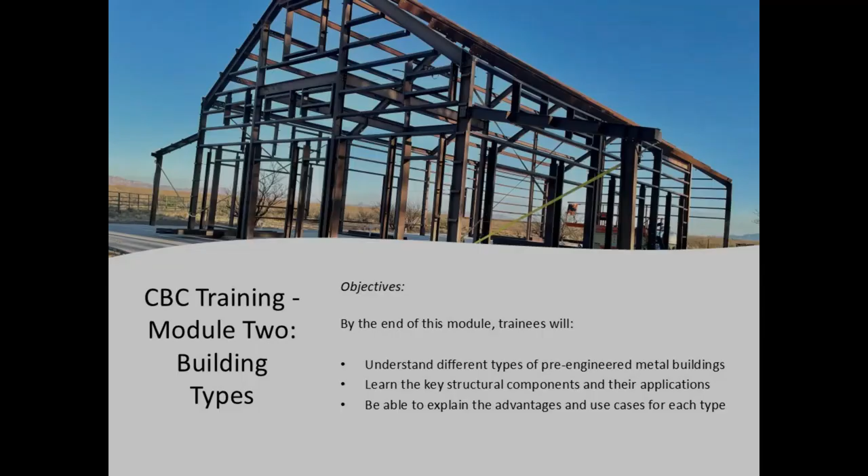Pre-engineered metal buildings, or PEMs, are factory-fabricated and standardized building systems. They provide an efficient, durable, and cost-effective alternative to traditional construction. These structures are used in various industries for many different applications. Some common uses include warehouses and storage facilities, manufacturing plants, retail and commercial buildings, aircraft hangars and truck terminals, agricultural and farm structures. Now let's explore the different types of metal buildings used in these industries.

The first type of building we will discuss is the clear span building. A clear span building combines the proven strength of a rigid frame with exceptional size flexibility. These structures maximize interior space, making them ideal for manufacturing plants, warehouses, offices, and retail stores, where uninterrupted open areas are essential. Beyond the interior, size flexibility also plays a key role in optimizing land use, ensuring efficient site planning.

Inside a clear span building, you have near total flexibility to customize the height, width, and roof slope to meet specific project requirements. Clear span buildings are designed with no interior columns. This allows for maximum open space, making them ideal for large equipment, storage, or work areas. Key features include widths ranging from 20 to 150 feet, eave heights between 10 and 30 feet, roof slopes between 0.25:12 and 4:12. Available in tapered or straight columns, can be expanded using lean-to structures.

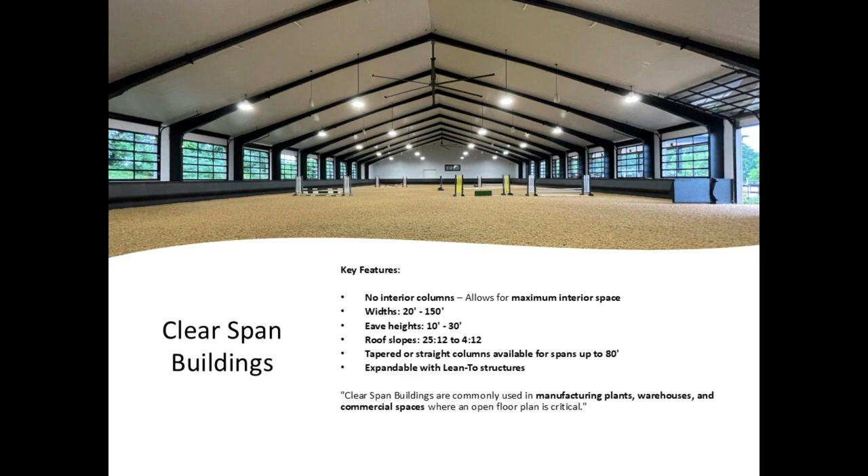Let's take a moment to review the advantages and considerations of clear span buildings. Advantages: clear span structures offer no interior obstructions, making them ideal for large equipment, storage areas, or open workspaces. They also provide flexible design options, allowing for adjustments in height, width, and roof slope to meet project-specific needs. And with future expansion in mind, clear span buildings can easily integrate lean-to additions, giving you room to grow.

Considerations: however, they may not be the most cost-effective solution for extra-large buildings. Wider spans often require heavier framing, which can increase material costs. Up next, we'll take a closer look at multi-span buildings, a great option for larger projects where cost efficiency is key. Multi-span buildings use interior columns to provide additional structural support, making them cost-effective for large-scale structures.

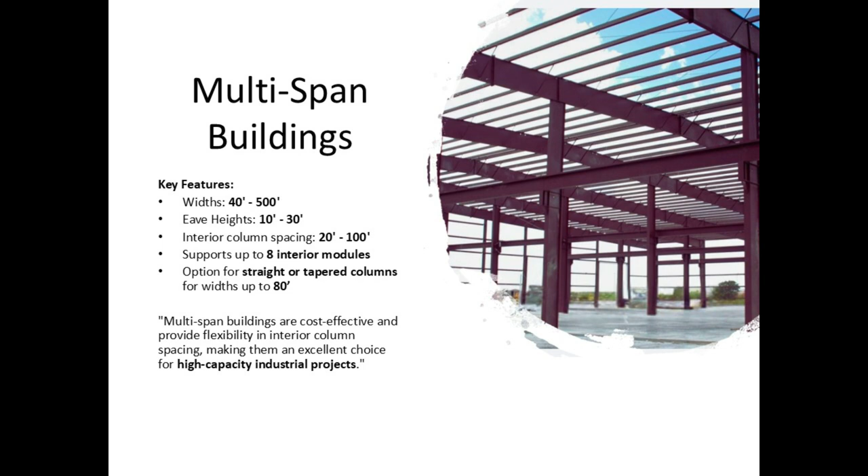Key features include widths from 40 to 500 feet, eave heights from 10 to 30 feet, interior column spacing of 20 to 100 feet, supports up to 8 interior modules, available in straight or tapered columns. These buildings are ideal for industrial projects, truck terminals, and warehouses that require high capacity and flexibility. Now let's look at the advantages of multi-span buildings. They are more cost-effective for large buildings than clear span buildings and provide greater size flexibility. Multi-span buildings can support heavy loads, cranes, and additional equipment.

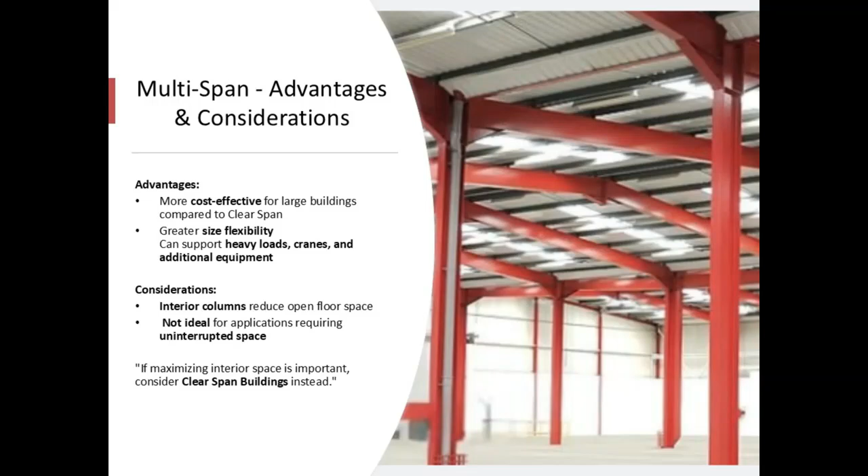Here are some considerations when considering a multi-span building. First, interior columns reduce open floor space. And second, multi-span buildings are not ideal for applications requiring uninterrupted space. If maximizing interior space is a priority, clear span buildings may be a better choice.

Next, let's talk about lean-to buildings. Lean-to buildings provide a cost-effective way to expand existing structures without constructing a separate building. Key features include widths from 8 to 60 feet, eave heights from 8 to 30 feet, roof slopes between 0.25:12 and 4:12. Lean-tos are attached at or below the eave of the main building. Lean-to buildings are commonly used for storage areas, covered workspaces, or as additional facility expansions.

End walls provide structural support and determine future expansion capabilities. We offer 3 types of end walls. The first type is the bearing frame. The bearing frame is the most cost-effective, but not expandable. The second end wall type is the expandable main frame. This frame is designed for future expansion. The third type of end wall frame we offer is the non-expandable main frame. This frame provides structural support but cannot be extended for future expansions. Choosing the right end wall type affects cost, expansion options, and structural integrity.

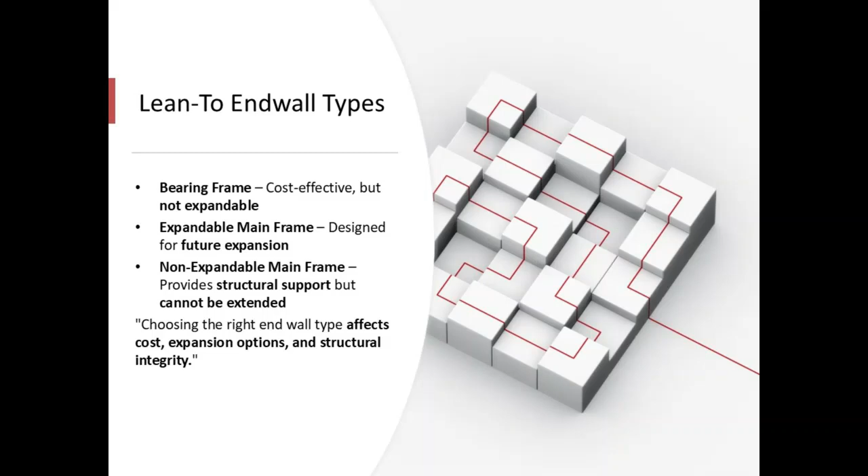The bearing frame end wall is lighter in design and weight than the main frame end wall because it only supports the roof load of one half of a bay. The end wall columns support the channel rafter and also serve as columns for attachment of the end wall girts and transmit wind load into the foundation and structural system. Bearing frame end walls also require a form of bracing, whether it be X-bracing, portal frames, or diaphragm action. The benefit of having a portion of the building with an unobstructed floor area while maintaining the cost savings of a multi-span building.

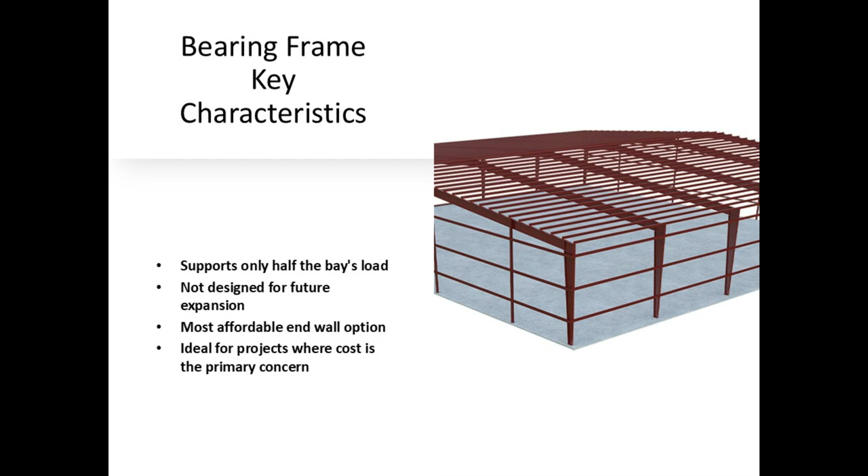The use of a bearing frame end wall is a matter of economy. You will usually find the prices of the bearing frame end walls are much more economical than the expandable main frame end walls. The expandable main frame end wall is used where wall structurals and covering panels are required.

Since the expandable main frame is designed to accept a full bay loading, it may be used for ease in any future expansion. The key characteristics of an expandable frame are, they are designed to carry an additional bay's load. Using this frame allows for seamless future expansion. Expandable frames are built with heavier steel components for added strength.

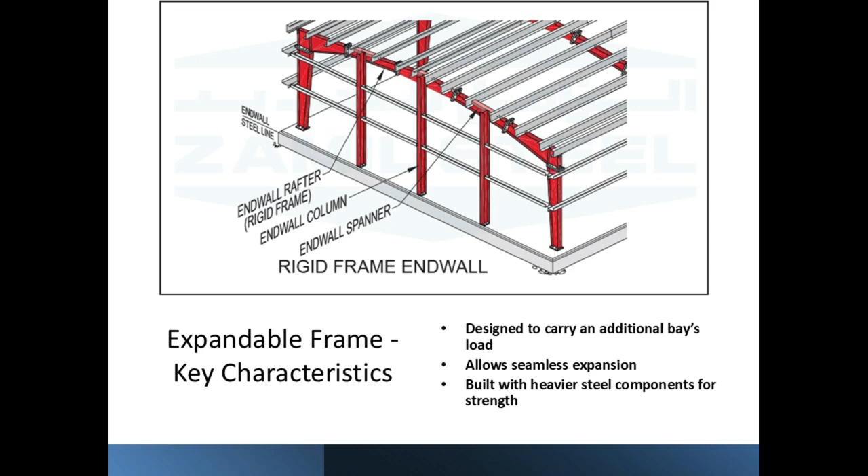The expandable main frame end wall is a combination of the standard main frame with end wall columns. The end wall columns do not support, but serve only as columns for attachment of end wall girts and transmit the wind load into the foundation and structural frame. The expandable main frame's largest advantage is that it provides for easy expansion. Since it is a main frame, it will carry the design load of a full bay, and it can remain in place if the building is expanded.

The non-expandable main frame end wall is still a main frame with end wall columns, but cannot be used for future expansion. The non-expandable frame can only carry the design load of one half bay. Both the expandable and non-expandable main frame end walls provide for more flexibility and ease in locating large framed openings or entrance doors. Locate the openings by simply adjusting the end wall column spacing. Also, the main frame end walls do not require any form of bracing, therefore X-bracing or portal frames will not interfere with large openings.

The characteristics of the non-expandable frame are as follows. They provide additional structural support. They are not intended for future expansion. They are lighter than an expandable frame. They can be used for buildings with large doorways or heavy loads.

When it comes to selecting the right end wall frame, it's important to consider your project priorities. Let's break it down. First, choose a bearing frame if cost is the main factor and expansion isn't needed. This is the most economical option, ideal for fixed-size buildings. Second, choose an expandable frame if there's a possibility of future additions. This frame is engineered to support extra loads, making expansion seamless down the road.

Third, choose a non-expandable frame if your project requires additional strength, such as for heavy loads or large openings. While it doesn't support expansion, it offers the reinforcement needed for more demanding applications. Each frame type has its purpose, so choose the one that best fits the current and future needs of your project. Let's take a moment to recap what you've learned.

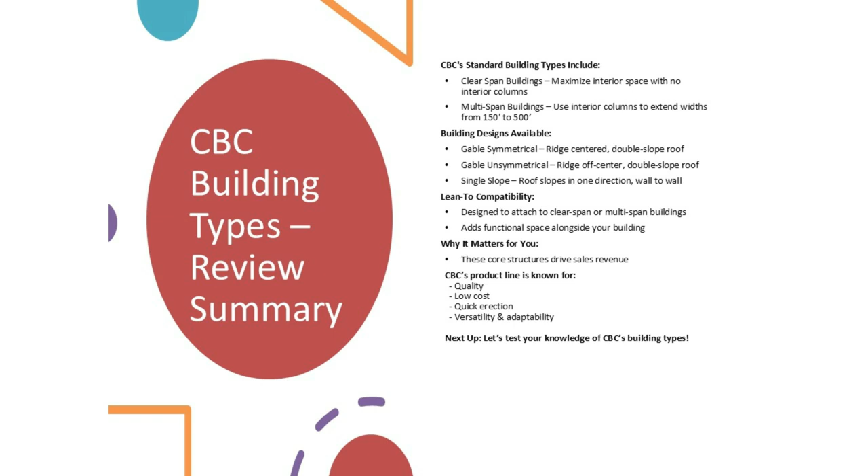These building types form the core of CBC's product line, recognized throughout the industry for their proven quality, cost-effectiveness, ease of assembly, and versatile design options. They represent a key revenue opportunity for you and your business. Now let's test our knowledge of CBC's building types.

Now that you've completed the core content of Module 2, it's time to put your knowledge to the test. This quick review will reinforce the key concepts we've covered: building types, their structural differences, and how to match the right solution to your customer's needs. Take a moment to reflect on what you've learned, and when you're ready, let's test your knowledge of CBC's building types. What type of building allows for the maximum use of uninterrupted interior space?

A. Multi-span building. B. A building with interior columns. C. Lean-to. D. Clear span building. E. None of the above. The correct answer is D.

Clear span building. Clear span buildings are specifically designed without interior columns, making them the best option when open, unobstructed floor space is required. They're ideal for warehouses, manufacturing plants, and retail environments where maximum usable space is critical. In contrast, multi-span buildings and buildings with interior columns divide up the interior, and lean-tos are typically used as secondary additions, not for primary open space.

Question 2. Clear span buildings with tapered columns are limited to 180 feet as a standard. A. True. B. False. The correct answer is B. False. While clear span buildings offer impressive flexibility, the standard maximum width for tapered column designs is 150 feet. Widths beyond that may require special engineering or structural modifications. It's important to keep this in mind when planning or quoting large span structures.

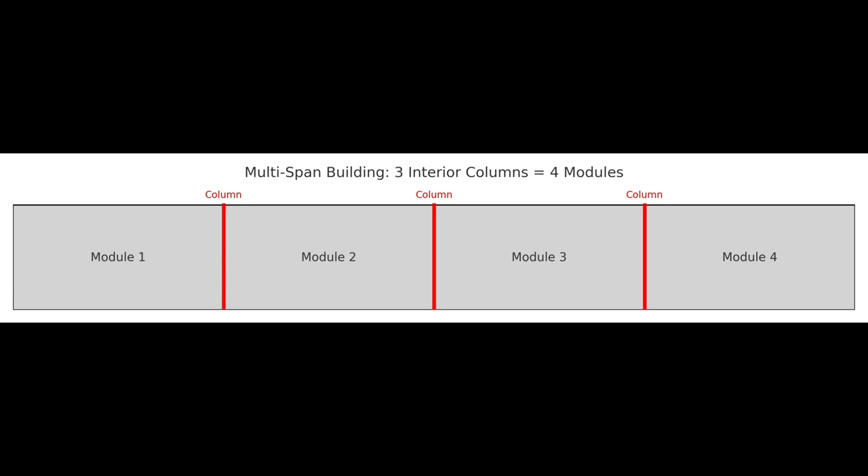Question 4. A multi-span building with 3 interior columns will have how many modules? A. 1. B. 3. C. 2. D. 5. E. 4. The correct answer is E. 4. In multi-span construction, each space between columns is considered a module. So, with 3 interior columns, you create 4 distinct modules, 1 between each pair of columns and 1 on either end. This modular breakdown is key to understanding load distribution and interior layout planning in large metal buildings.

Question 5. The most economical end wall is A. Expandable mainframe. B. Bearing frame. C. Non-expandable mainframe. The correct answer is B. Bearing frame. When we're not considering building width, column spacing, or loading requirements, the bearing frame end wall is the most cost-effective option. It uses lighter materials and is engineered to support only half of the adjacent bay's load, which helps reduce fabrication and installation costs. This makes it an ideal choice for projects where future expansion isn't planned and budget is a top priority.

Question 6. Which type of building is not a self-supporting structure? A. Single slope. B. Gable unsymmetrical. C. Gable symmetrical. D. Lean-to. The correct answer is D. Lean-to. A lean-to structure relies on an adjacent main building for support. It's designed to attach to the side of another structure and cannot stand on its own. In contrast, single slope and gable-style buildings, whether symmetrical or unsymmetrical, are self-supporting, standalone structures. Lean-tos are an excellent way to add extra covered space, but they require a primary frame to anchor to.

Question 7. When a lean-to does not extend the full length of the main building and begins or ends at an interior main frame, a bearing frame end wall is the standard condition on the lean-to. However, a main frame end wall could be used if necessary. A. True. B. False. The correct answer is A.